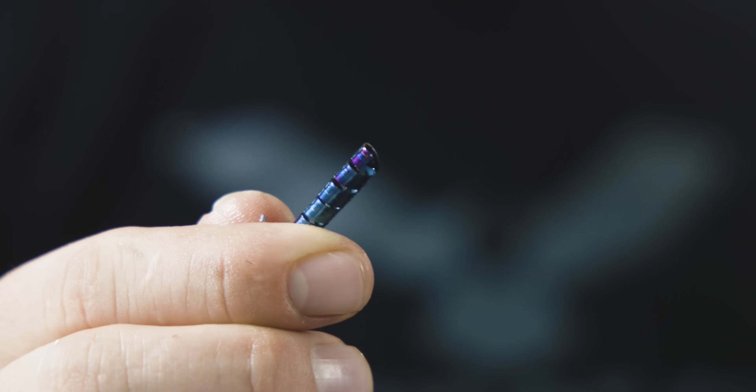On steels, on these smaller diameters, it can be really, really tricky to break the chip. So with this tool, I'm allowed to run at a way higher surface footage, which allows me to run at a way faster feed rate, which makes it very easy to break the chip. Really, look at this - that looks like a normal lathe chip, right? It's actually really impressive how well it worked.

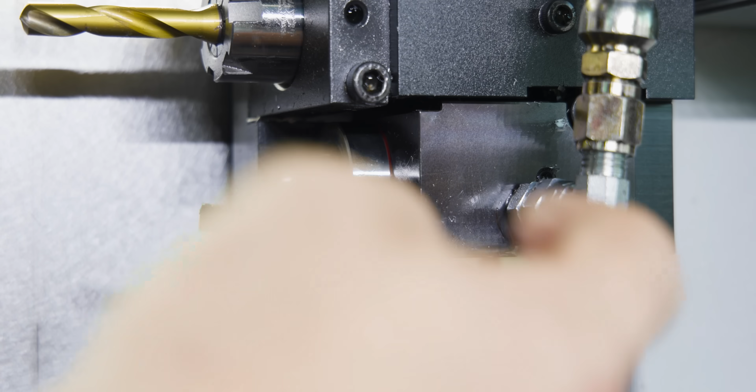All right, so check this out. This thing right here really blew my mind. We have a horn insert in a graph tool shank in a W&F live holder. With those three technologies together, I was blown away at how not only did I have a perfect run out, but this thing absolutely rips through material.

If you are doing any kind of keyway cutting on a Swiss machine, you really want to consider this. This thing works really, really well.

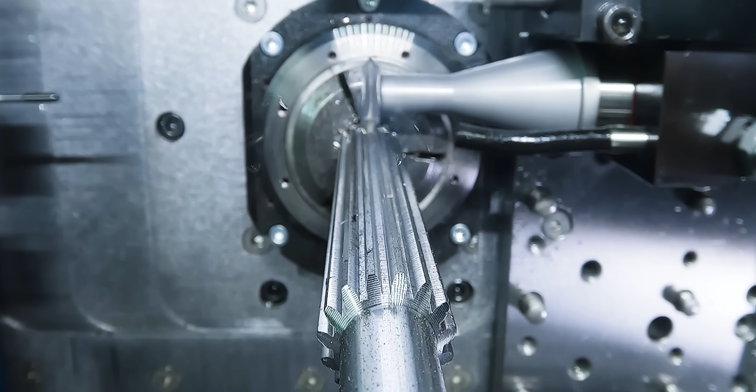All right, so now to show you how programming all of this can actually be really easy, come to my computer, I want to show you. So the part we're making today is a spline shaft. Let's hop into our simulation and take a look at how all this works.

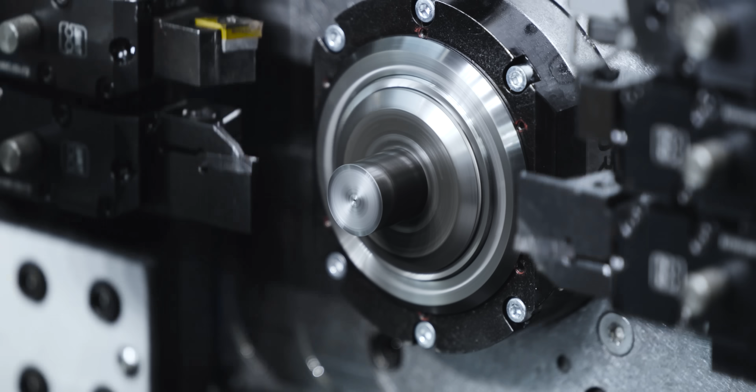So the first thing is you face off and cut your chamfer on the front. Then after that, I groove behind the first spline section. That way, when I run the key cutter through my spline, the burr goes out into the groove and it's not in the spline. It won't affect the functionality of the part.

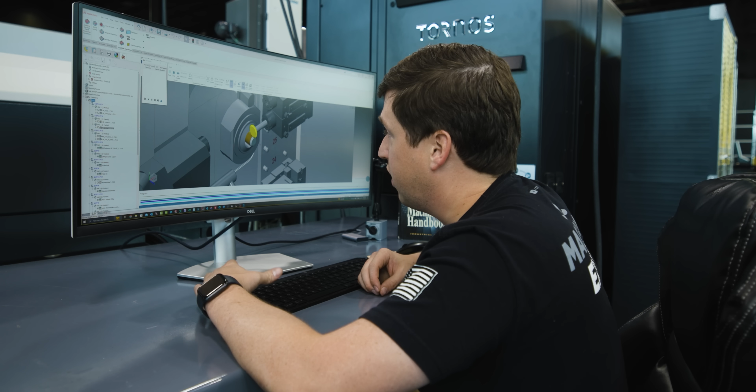Now you'll notice something here - I turn my OD last, and that's because on a Swiss machine, your material is the work holding. If you turn away your material, the part won't be supported. So I actually put the spline on there first, and then I come in and skim the OD to get the part to size. This is a really nifty trick you can do in a lot of applications on a Swiss machine - you can actually turn the material away last and do other milling operations like this.

So you'll see right here, it comes in, it turns the OD, and then I drop in with that Kennametal Cermet insert, and I absolutely rip the stock away.

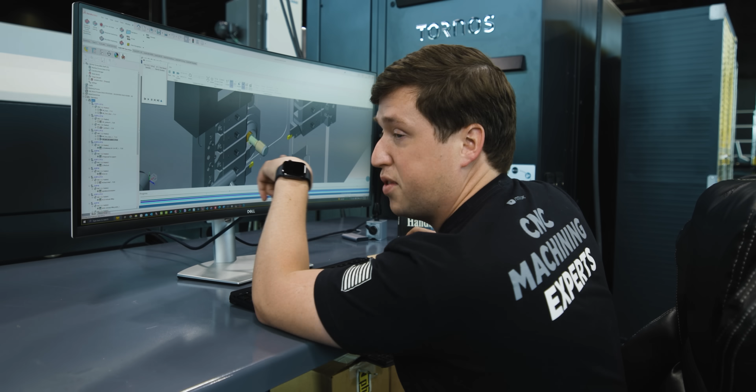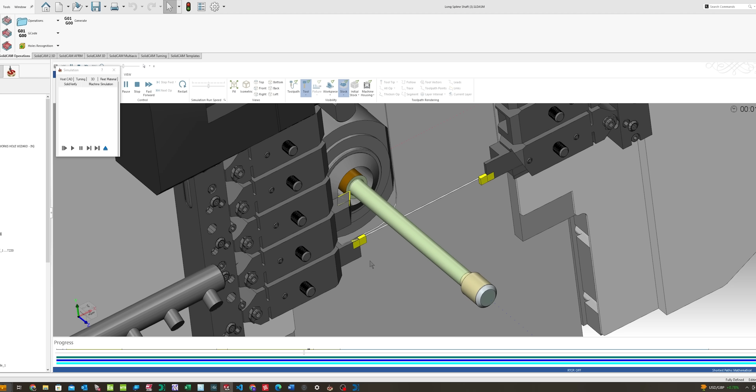This right here will probably be my favorite part of the simulation. This was the one thing I was worried about when processing this part - we're going to come in and grab the front section of splines with the sub-spindle, and then we're going to machine all the splines in between spindles. This can be kind of hard to imagine in your head, right? You have a lot of moving parts, multiple things synchronized with each other. You've got to be very, very careful.

To have everything laid out like this so I can see what's gonna go on before I go up to the machine is essential. One wrong line of code right here, and you could break multiple things that cost thousands of dollars. You don't want to do that. So the way SolidCAM lays it out for you and shows you what this is gonna look like before we run it is really, honestly, very, very nice.

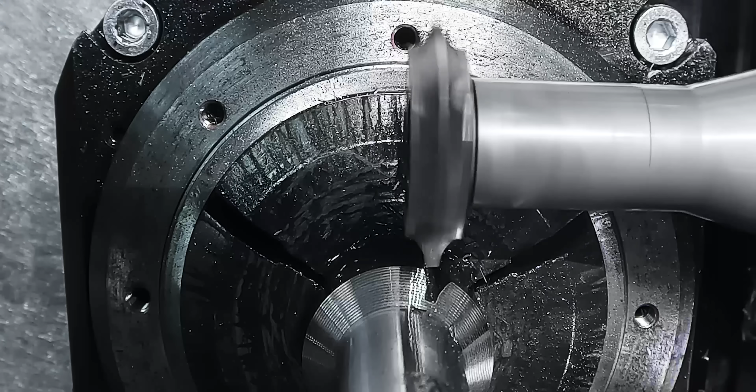It's very, very simple. Again, that tool from Horn that does this really ripped through that stock. I was blown away at how it functioned like that. Normally those tools chatter like crazy. The fact that I could just drop in there with that rigid of a tool and just rip my splines away like that, really, I have been very, very impressed with that tool.

So yeah, you'll see I come in here now and I turn away the OD of my part. You can see both spindles are synced together.

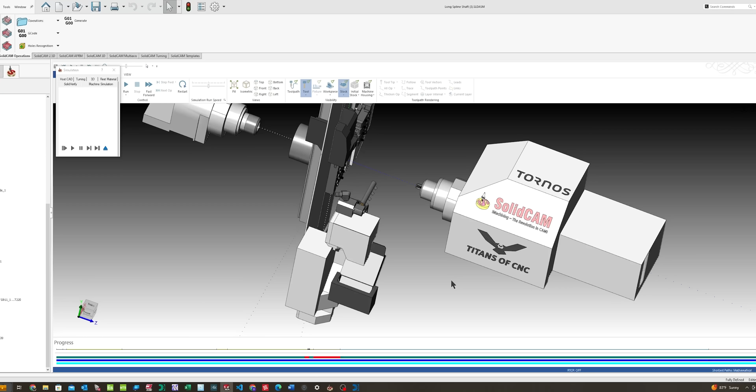One thing you might be wondering is, how do you get that part out of the machine? Because my ejector right here can only take a 4.5 inch long part. So if your part's 12 inches, then what do you do, right? Well, that's exactly what I want to show you, because Tornos actually has a very, very clever way to get the part out of the machine.

All right, so let's take the covers off this thing. I want to show you how it works. It's very, very simple, but also very brilliant. So we will pop these covers off.

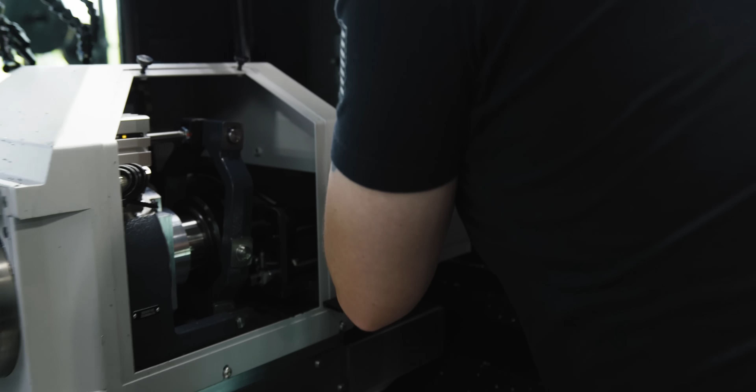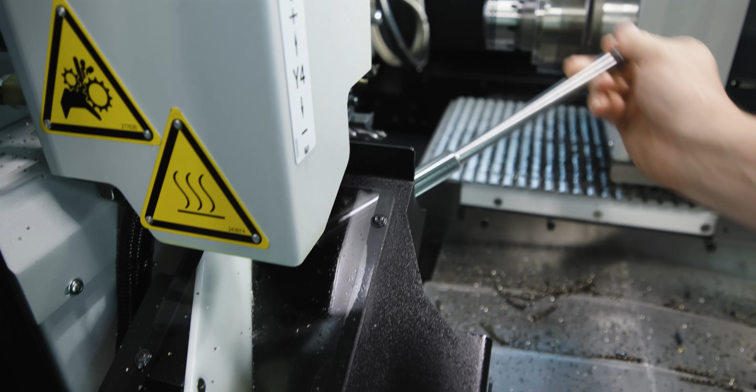Okay, so like I said earlier, we have a problem with this part. This right here is our normal part ejector. I'm pretty sure you can see this part won't go through that very well. It just won't, it's just too long, right? So our only choice now is to actually feed the part through the spindle and out the back of the machine into a tray.

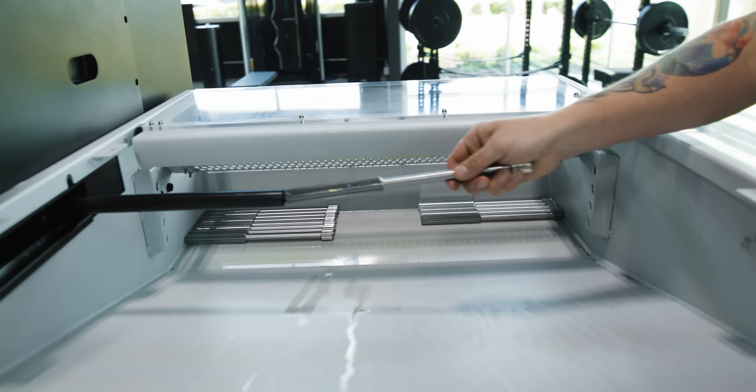So all it requires to eject this part is simply making another part. The parts themselves are what is ejecting the part. Each part you make will push the previous part out through the tube and into this tray.

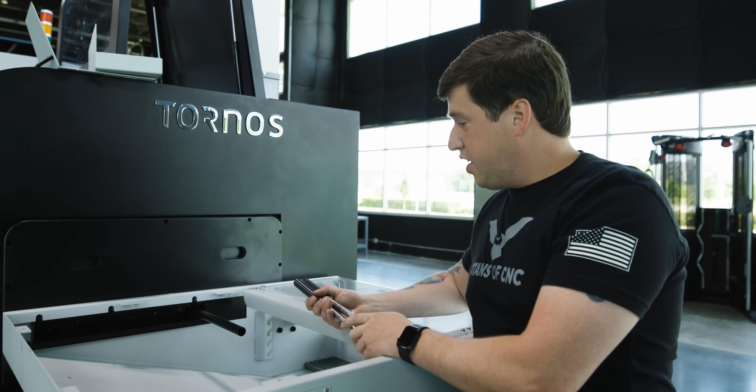Now there is one extremely vital thing I want to talk to you about, and that is the diameter of your part to the inside diameter of your tube. If your part is less than 50% the diameter of your tube, what can happen is your parts can stack in the tube. And if you do this, it will start a fire. Definitely don't ask why I know that, but it will. So you need to make sure that your tube diameter is very close to the diameter of your part. That way, instead of overlapping like this, they'll push each other through and make this whole system work flawlessly.

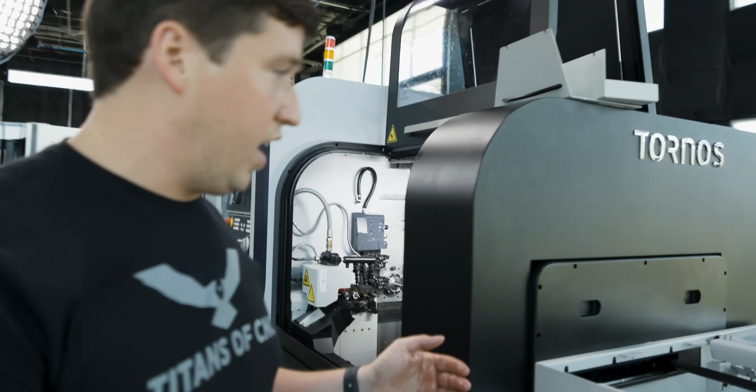So a cool thing to show you too is one thing you gotta realize with this is that X has to move, right? So they actually make a pretty cool little slot right here. This will allow the X4 axis to move left and right without doing any damage to the outside of the machine. And another thing I do want to say is I have all the covers off this right now so I could show it to you. Normally this is completely enclosed. You can't just stick your hand in there or anything like that, but it also makes it impossible for me to show you, so I took it off.

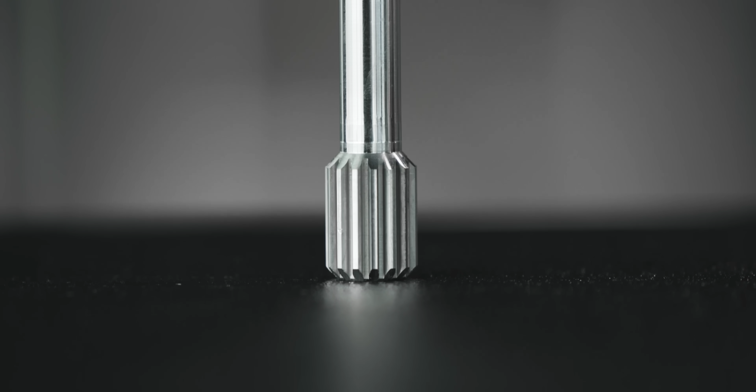All right, well that is it for our video today, guys. I walked you through all the little different tricks and tips for running a longer part like this on a Swiss machine.